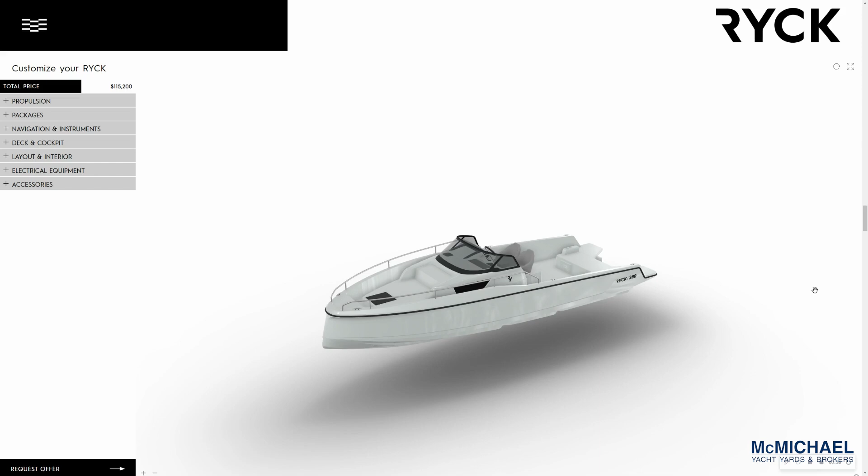Hello from McMichael. Today we're going to look at the RYCK 280 from RYCK Yachts.

Now we're going to focus a little bit on some of the questions we get about how this boat looks. And yes, it does not look like a traditional day family boat. And there's good reasons for that. So I'm going to zoom in a little bit here. We're going to focus mainly on the design.

So first and foremost, you'll notice that there is a very consistent shear line. It's just ever so slightly curved here. But then our freeboard, we have a reverse bluff bow. Our freeboard is consistent pretty much all the way aft, and there's a fair amount of that freeboard. And what that means is on the inside, we're gonna have a higher gunnel, a little more safety, but more importantly, it's part of the overall hull design.

So if we look from this angle here, I'll try to zoom in a little bit more, you can see that we actually have two chines. So there is a full chine that starts out reverse a little bit here and then flattens out. And this lower chine continues all the way aft. But then you can see right here, there's a secondary chine. Now that's going to help keep the water spray down. It's also going to help in turns.

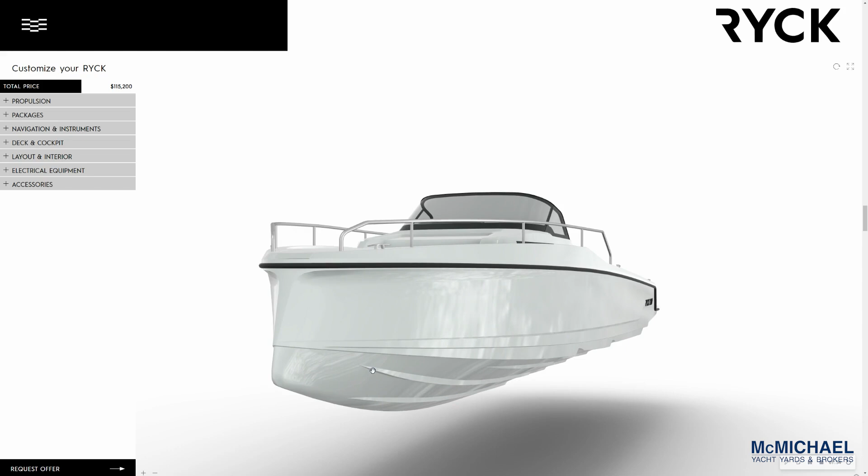You'll notice that there's strakes here as well. There's two that come almost full forward, then a third that picks up over here. Now we'll talk about those a little bit more as we move aft. So here you'll notice that this is a stepped hull. Now generally the reason for stepping a hull is to reduce drag, and what you're doing is introducing air, and that reduces drag. And with these two, you're going to get a ride that is going to be faster than a traditional hull design.

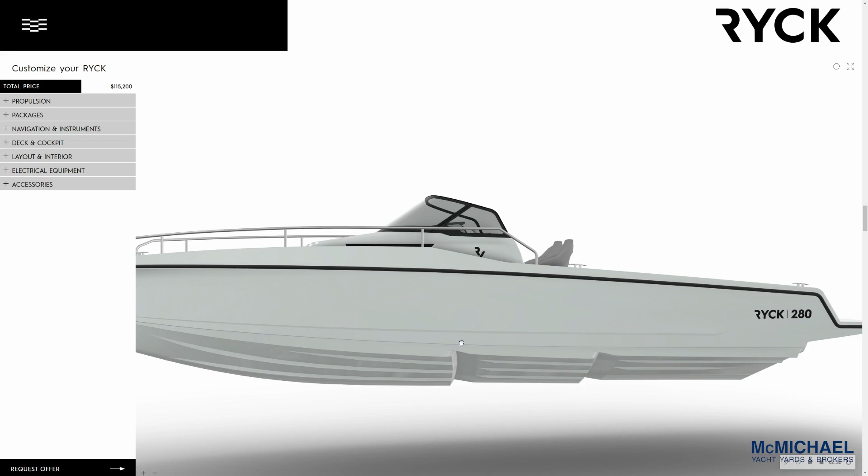Now the way that Hanse has approached this is a little different. A lot of times the step will come and interrupt the chine. Luckily on this particular design, it does not. And what that means is you're going to have more stability in a turn. And that's pretty evident when you ride the 280. Now you'll see that the strakes are running full length. And then we get to the very aft end here. The middle two strakes dissipate to a flat running surface, and that's our primary wetted surface.

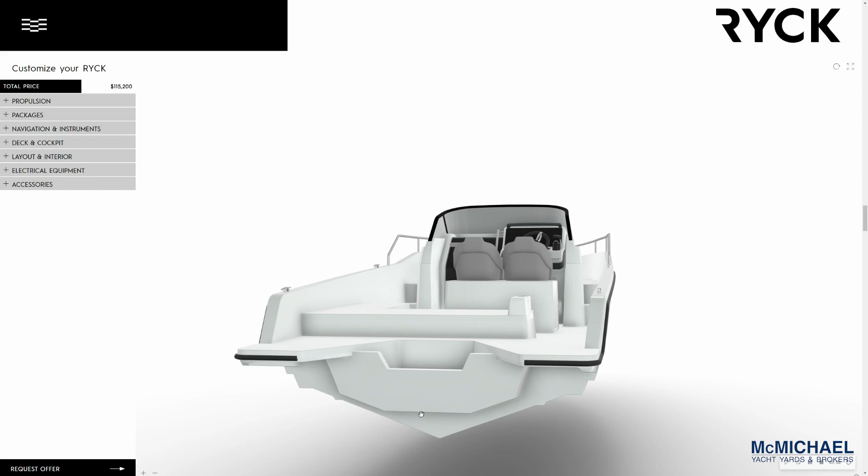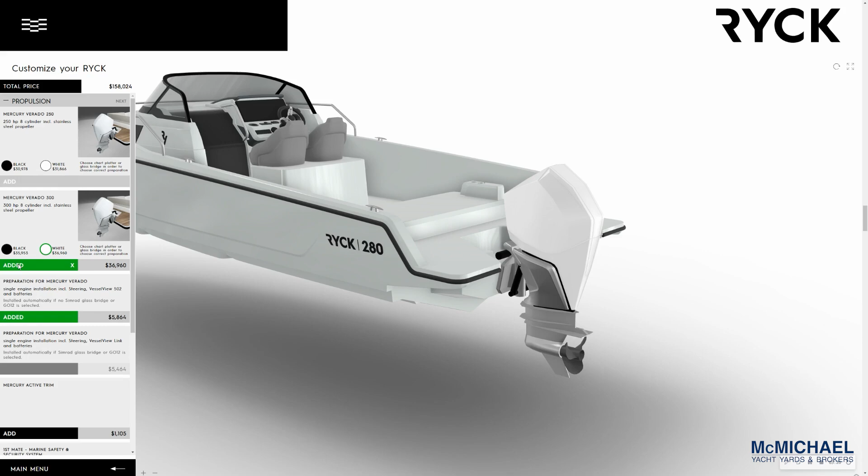Now you'll also notice aft that we have an engine box. Now this gets the engine back a bit, but it also adds buoyancy. And you'll see that we have a very sharp ended step here at the transom. So I'm going to go ahead and put the engine on here. We're going to select the Mercury 300. And I'm going to add that. And I'm in the configurator, so this is a really good tool that Hanse has designed. It lets you design the boat the way that you want. So we can see the engine here in position.

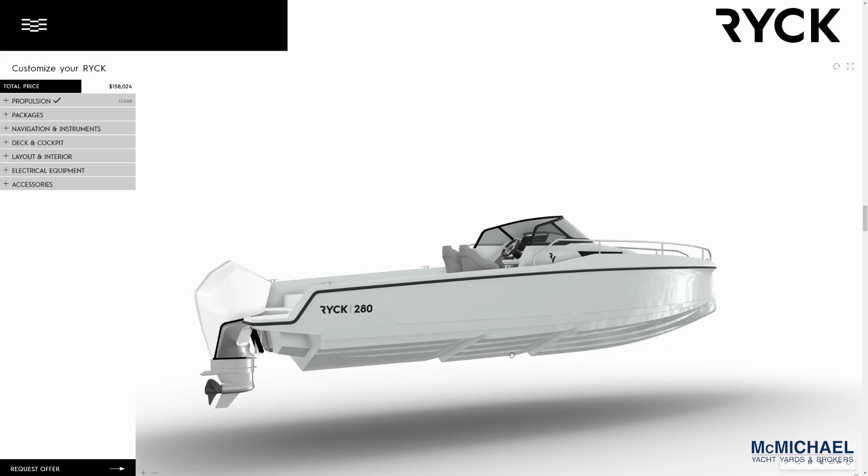Now, if we take all those elements, good high freeboard, the deep V entry here at the bow, the double chines, the strakes that we have, the stepped hull, the engine box, and the cut at the transom. Notice the gearcase, which is this bullet point down here on the engine. So this pad that comes out here is the anti-cavitation plate. And then the bullet here is below the keel. Now, what that is doing is, number one, they're getting rid of drag back here, but they're getting clean water to come directly into the propellers. So a lot of thought has gone into this particular design on the 280. And it's one of the reasons that in our experience, not just with our boaters, but ourselves driving this boat, you get such a good ride.

Now, another important factor is, and probably easier if we look at it from overhead. So this boat is 31 feet long, and its beam is 9 feet 3 inches. So that is a 3.4 to 1 length to beam ratio, and that is optimal. That is what we want. Many builders will push the beam to make their boats look a little bigger, but the way that Hanse builds this boat, you have plenty of interior space.

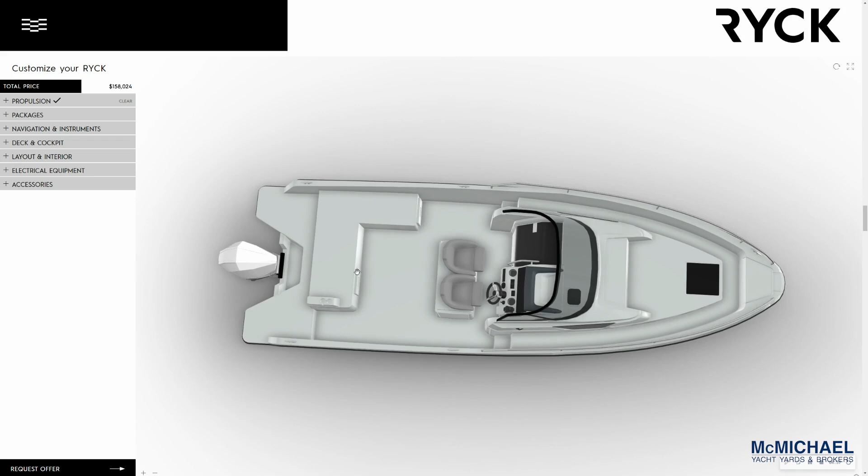And so by optimizing that ratio, it allows this boat to go through the water needing less horsepower. So a 300 horsepower engine on this boat is going to give you the same performance as a 350 or even a 400 on boats of very different designs, ones that we would consider more traditional. So while this may look a little different to us, there's reasons for it, and all of them are positive and good. So that's a little look that we had today on why the Hanse RYCK 280 looks the way it does and the advantages of its hull design.